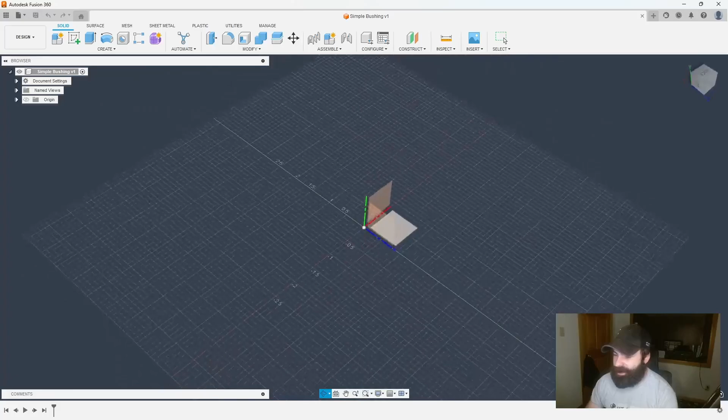So what I'm going to do is create a sketch. In this case, my machine is going to be a Z and an X axis rotational machine. However, I'm going to sketch on the ZY plane, and this is personal preference. There's no right or wrong here. Don't worry if you guys were to do a setup later for milling. It's not a big deal.

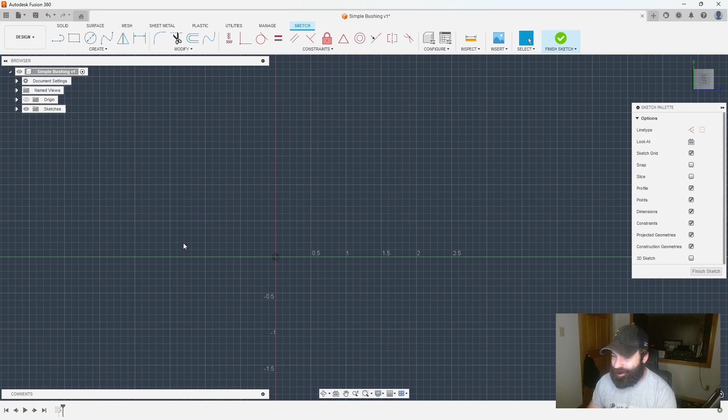But as my last video has said, I'm a big fan of rectangles, and rectangles will do a lot for you. So we're going to go ahead and sketch a 2-point rectangle. As you're going to see, I am going to drop several rectangles very quick.

The reason for this is in the case of this bushing, we're going to have a shoulder, as you guys can see here. We're also going to have a step with a bore. So with very little mouse clicks of the two-point rectangle system, I can very quickly create those profiles that I want to machine or turn or use in my design. So I'm actually going to undo those two, and we're going to hit escape to cancel out our rectangle tool.

But now we can start to be precise with this. So I'm going to go ahead and go to sketch dimension, and I'm going to go off my center line to the inside of my bore. And that being said, I want a 5/8 bore maybe. So I'm going to say 0.625 divide by 2, giving me that inside diameter.

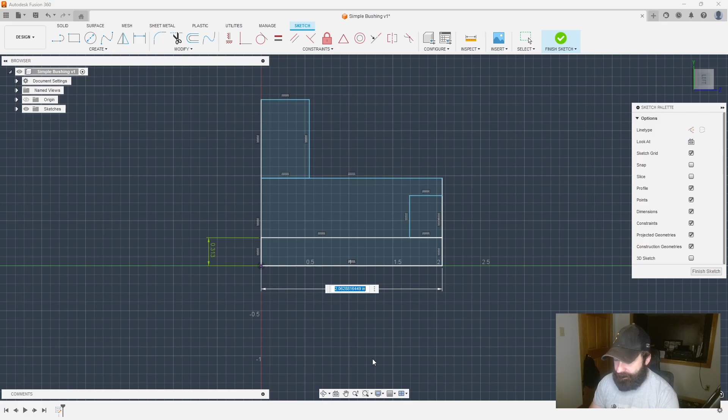And then from there, I could start to add more dimension. It doesn't overly matter which way you dimension everything. Maybe this bushing is 2 inches long. I want the actual OD of this area here. We did 625 there. Let's go 1 inch divide by 2 because we're looking for that radius.

And now you're seeing we're starting to run into some of our first problems. Our sketch design is different than what we have. That's okay, we can hit escape. We can drag that line down because it's not fully constrained. So the cool thing is we can actually position this any way that we want at the end of the day.

So let's go ahead and add another rectangle in the meantime. Let's say we were going to put a bearing on both ends of this. So we're going to press in a bearing on both ends of this shoulder bushing or this roller, whatever we want to identify it as.

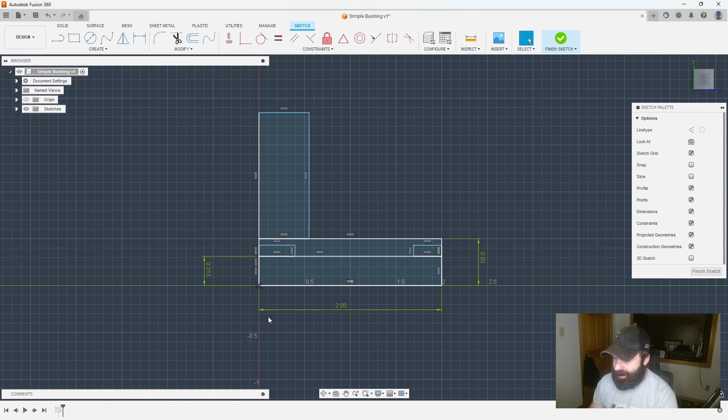Again, I'm going to go back to my dimension tool. I use the hotkey D. Let's get the outside diameter here. In this case, this is going to also be, let's go 1.5 inches divided by 2. I only want that shoulder to be 375.

And then we could start to set our actual race, where our races are going to push in and things of that nature. So we're going to go just a 1/4 inch in. I'm also going to make this a 1/8 inch tall.

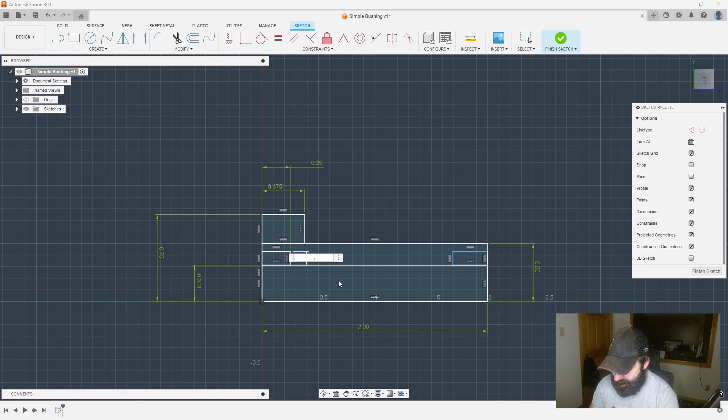And now that I have this first one, let's go over to the second one. So these are identical in my design. So I'm going to create that long dimension here, and I'm going to pick that first dimension. And what you're going to see is that's now fixed to one another.

I could do the same thing also on this side here by picking this dimension over here, which is D7, or I could actually use a constraint. And that constraint I'm looking for is called horizontal vertical. What horizontal vertical is going to do is allow me to pick the corner of both of those areas and then lock them to one another.

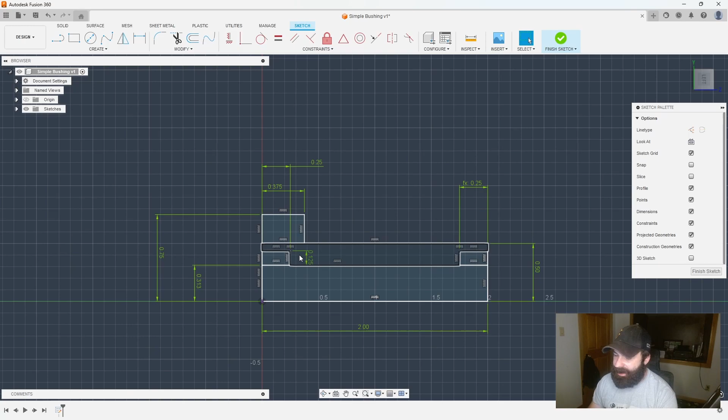So if this distance changes, this distance will automatically update without actually having to add more dimensions and possibly causing more confusion in my drawing.

Stand corrected, this is actually a sketch, not a drawing. So I'm going to go ahead and now reposition some of my actual sketch dimensions just to clean this up if I want to. You don't have to do this because none of this is really going to make a difference once we go in and create our solid body off our profile.

So now that I have the shape and the profile I want, a lot of you are probably questioning, why don't I trim these lines?

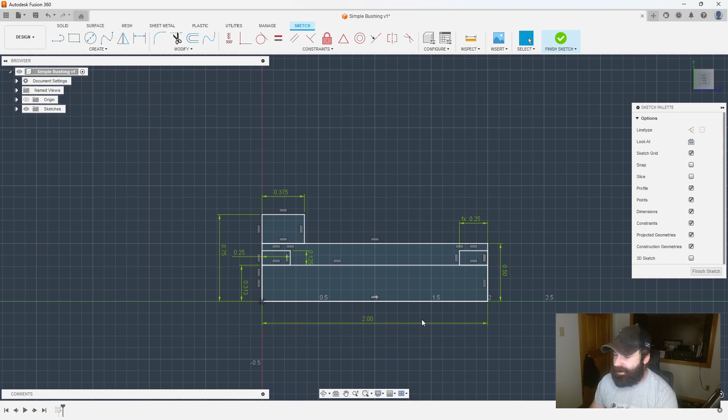The reason why I don't trim them is because I don't want to break any of the constraints in place. And the real profile that we're going to spin is just going to be these two little segments here. So I'm going to go ahead and hit finish sketch.

And then I'm going to go up to the top and hit revolve. Notice how I'm not selecting anything. You can pre-select these profiles if you like, but I'm actually just going to hit escape before.

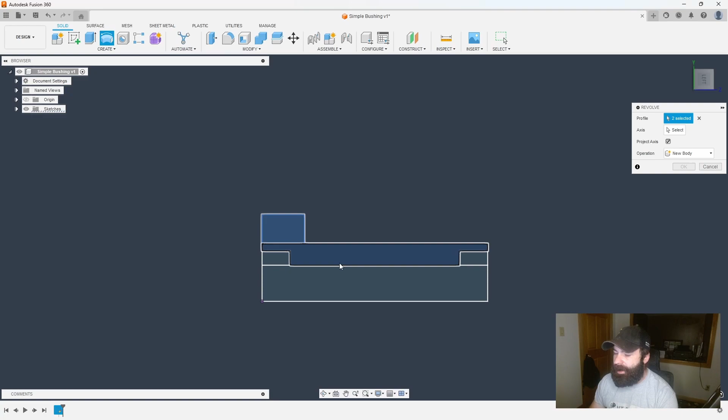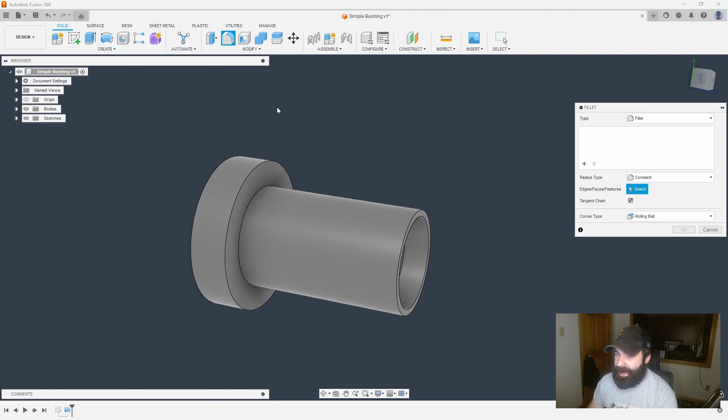So a few things that I didn't do - again, if I was to machine this, square corners are always a pain. But I'm actually going to go in and add some different details by modifying this body. So I'm going to put a nice little 30 thou fillet down here for my turning guy. I'm also going to possibly go in and add a couple of chamfers to this part.

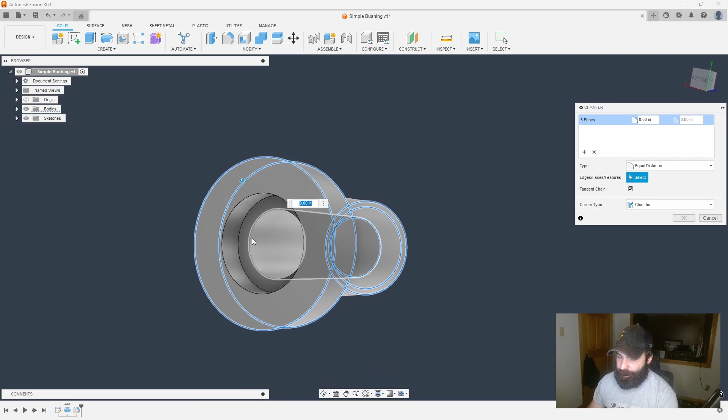So again, as I'm just picking the edges, we're going to go ahead and break all these edges. Again, we have a few on the backside. And let's just go ahead and throw in a 15 thou edge break everywhere.

And one thing that I did fail to do is we did do a nice radius on this outside. We should probably add a nice little radius in here, again, based on our tool that we're going to use to turn this. But a neat trick that you could do if you ever wanted to split a profile is...

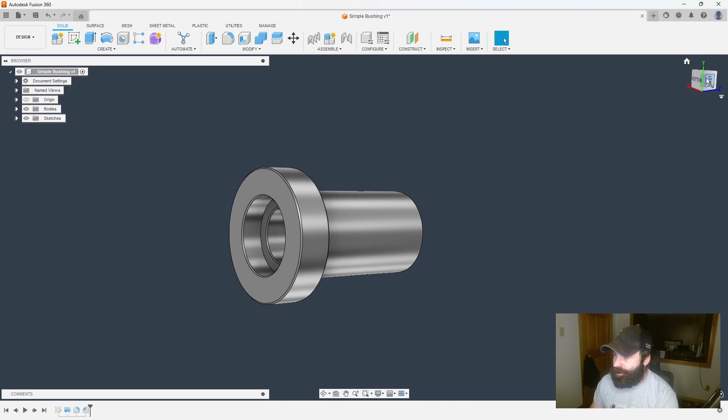we can actually go up here to inspect, and we could do a section analysis and pick our plane. And then we are going to have to flip this. And just like that, as you're seeing, we now have that half profile of our part. And we can turn this off at any time by going over here to the left in the Analysis area and toggling that on and off, making it easier to access the inside of our part and pick faces.

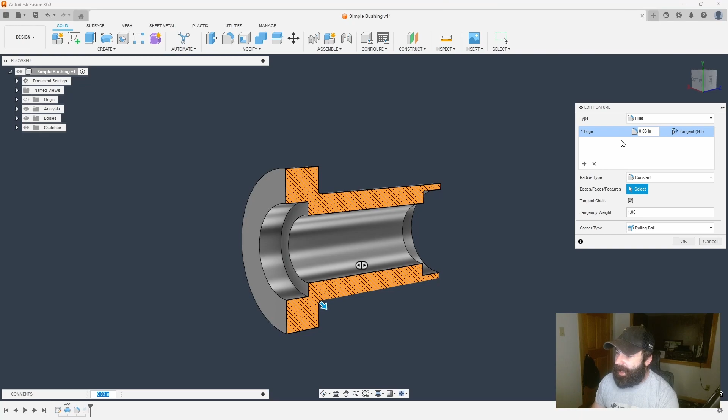So I failed to actually add those radiuses to other parts of my part. I'm going to go down here in my timeline and pick that radius. And then I'm not going to make them 30 like that first one - I'm going to make them 15.

So I'm going to hit that little plus sign, go through, pick the two edges I want to add, go ahead and plug in that 15 thou radius. And as you can see, I'm doing two different fillets of two different sizes, all in the same actual feature.

So now that we have that, we can go ahead and finish up our design. We could save this file, of course, so that it's ready to be manufactured or used later in a design. Another thing I can do is, let's say, for example, I need to change the dimensions of this.

I could actually go to my sketch down here in the bottom. And let's say we want to make this 3 inches long. I would like to make the OD of this guy actually 2 inch divided by 2. And then, you know what, this shoulder section right here is going to be - instead of 1, let's go 1.25.

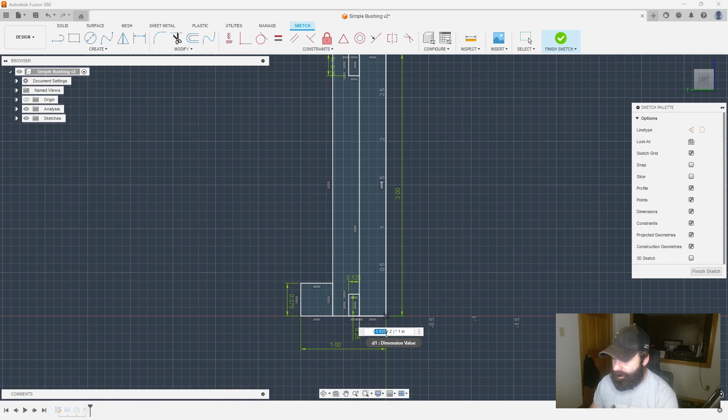And then let's change our bore also. So our bore is going to be 1 inch. So again, all I'm doing is going through and changing those dimensions to get everything adjusted.

We are going to actually have an issue with that, so I'm going to go ahead and change this guy to 1.5 just to get that profile a little bit cleaner. So as soon as I hit finish, notice how my entire bushing has updated now to all my new dimensions and still maintain that profile.

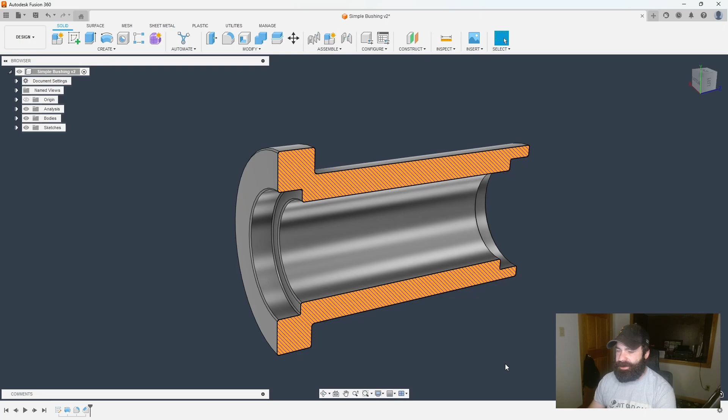So I'm going to go ahead and turn off that analysis so that we can look at that bushing.